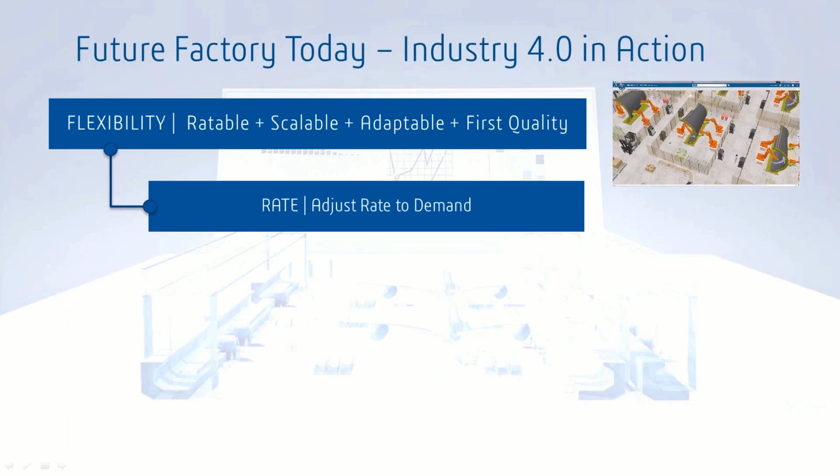Secondly, it's quality. And quality is one of the largest impacts to your production, to your capacity, to your committed date to deliver at the end. And the quality is not only impacted by human beings working on the shop floor, but the entire system, the availability of parts and the help we can give to the workers on the shop floor to produce better quality the first time.

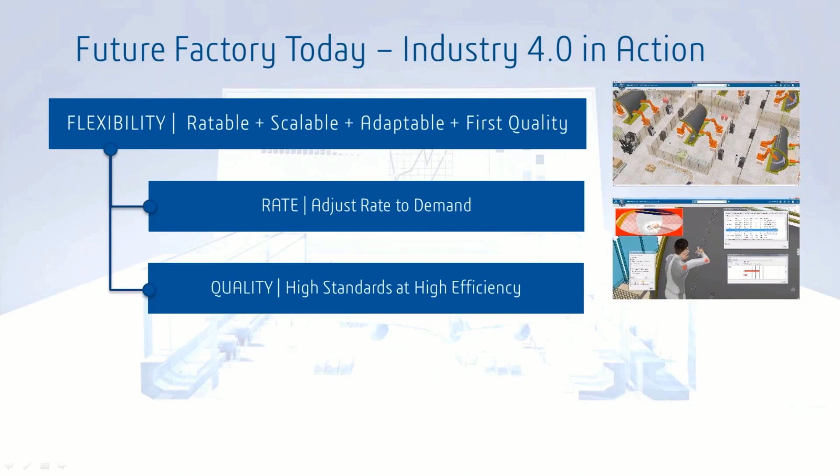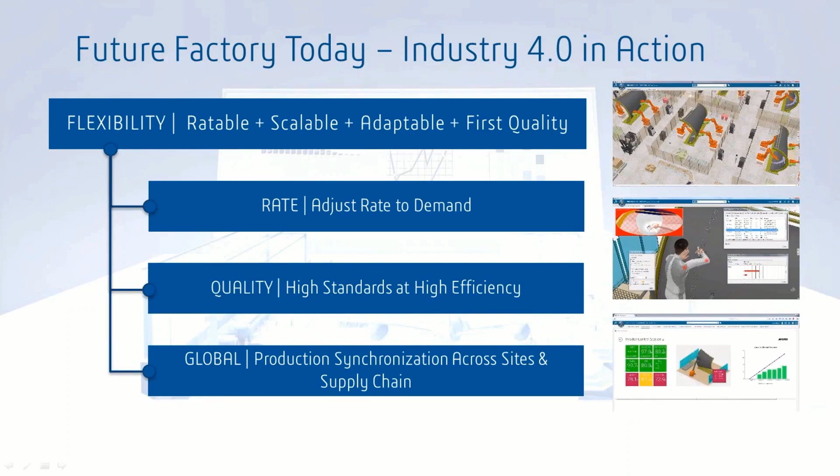Last but not least, globalization. Globalization is a large aspect starting from your supply chain, which is very important to meet your other goals, but also to look at your own production sites. It's not that it's only one; it is usually multiple production sites, spread across the continent or even around the world. And the synchronization of those production sites along your supply chain is very key to achieve your goals and the flexibility in that global system and network.

So we said there's a race, a manufacturing race, and you can see that almost all the governments around the world are heavily investing into the manufacturing of the future. All do it a little bit different, but at the end it all comes to four major pieces they support, and they want to research, develop, and get into a stage where it's really leverageable in your production environment.

First is the digital continuity. It's really the underlying data stream along your value streams, from engineering, design, manufacturing, execution, support, and services. Secondly is the vertical integration and the network of your different sites, your different resources. It's not that you will get the most benefit of focusing on one site and doing something totally different on another site. It's really, how do I evolve a factory of the future network throughout your entire production site.

Then the next step of connecting the smart factory - let the resources learn from each other. Once we establish this continuity, the deployment of the future factory to all your different sites, then let them learn from each other. Let's see how we can drive the factory to continuously improve it.

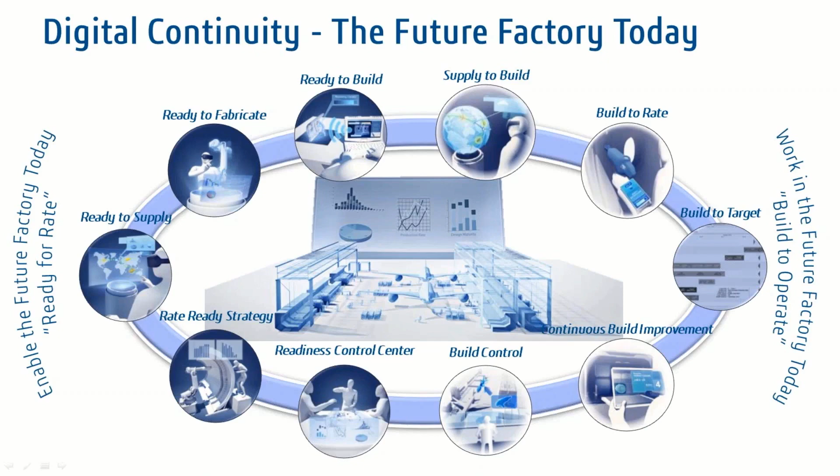To get this data, we have to be able to connect to the real world. And this connection can be to a machine, it can be to an RFID tag, to GPS data, scanners, or the HoloLens when someone is using it for executing work.

But it is key and important that once you go into that direction to have this data available, that you start collecting that data and make it available almost in real time so that you can harvest that and drive your optimization, your intelligence, and then do that loop of optimization throughout your value streams.

This is a kind of a summary slide of what I just said. You can pause here for a minute and read through.

But again, when we talk in the next following parts about technologies and how they can be leveraged for the factory of the future, the digital thread and the 3DEXPERIENCE twin of your production environment is key and essential really to connect those dots, connect those technologies and really leverage that rich data in the future.

So let me take you to Germany, because I'm based in Germany. I like to drive on the Autobahn, but sometimes we have construction sites there, and usually a construction site comes with a short on-ramp. Traffic is still flowing very fast, and you have a hard time to get on the Autobahn.

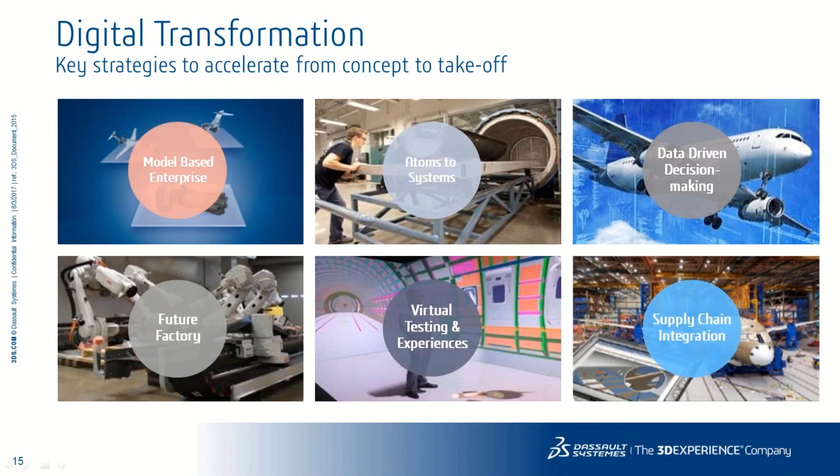So what is this 3DEXPERIENCE network about? As you've seen from the beginning of this webinar, there's a digital transformation going on, and it started a couple of years ago. It's not something new when we think about model-based enterprise, 3D design, and model-based definition data, and how this can be leveraged. But there are more things which can be developed further and will drive efficiency and advantages for the factory of the future and the entire value stream.

Looking not only at the factory of the future, but also the end-to-end process, based on an assessment we did, we see there's potential to cut 50% from the concept of an aircraft to system takeoff. We've demonstrated that with different projects and customers, getting from the idea to the first takeoff or first prototype and concept design in less than 90 days. This is the first indicator of how far we can go leveraging these new technologies and innovations.

So where can we bring this future into reality? I mentioned one site in North America, the 3DEXPERIENCE Center at WSU NIAR in Wichita, and the second one is the 3DEXPERIENCE Center in Hamburg, Germany. I'd like to show you a short video to introduce the concept behind both sites.

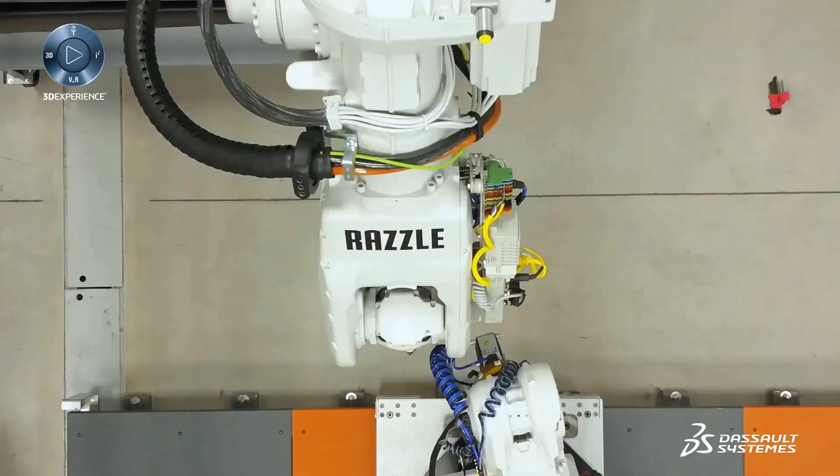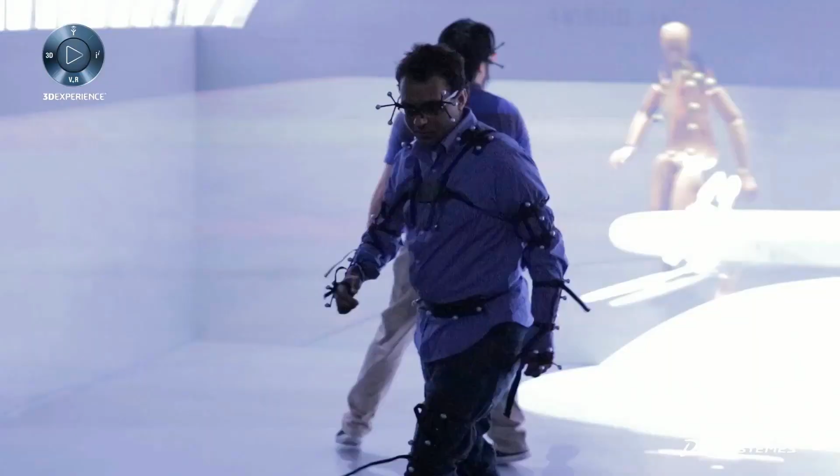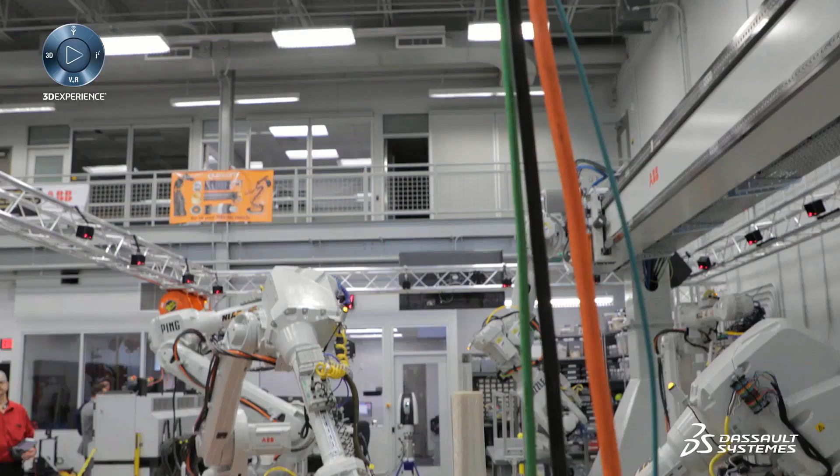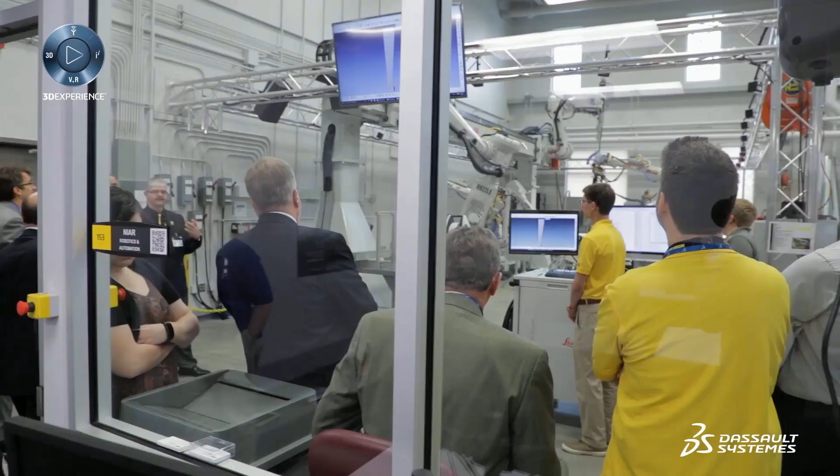We developed the 3DEXPERIENCE Center for various reasons. The sophistication, both in terms of processes, technology, mechanisms, and systems of work, is quickly accelerating. Our customers need a place where they can innovate, experiment, develop new ways of working and new ways of interacting with this technology, and see how that technology fits into their space and existing processes. This facility, although physical, is connected globally.

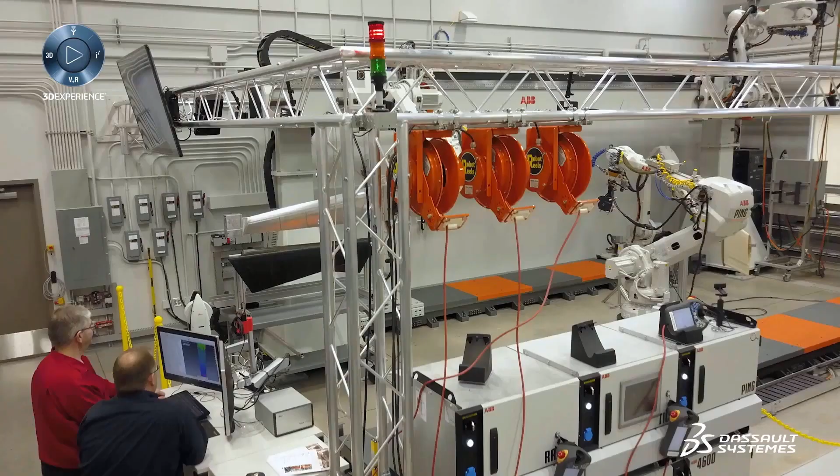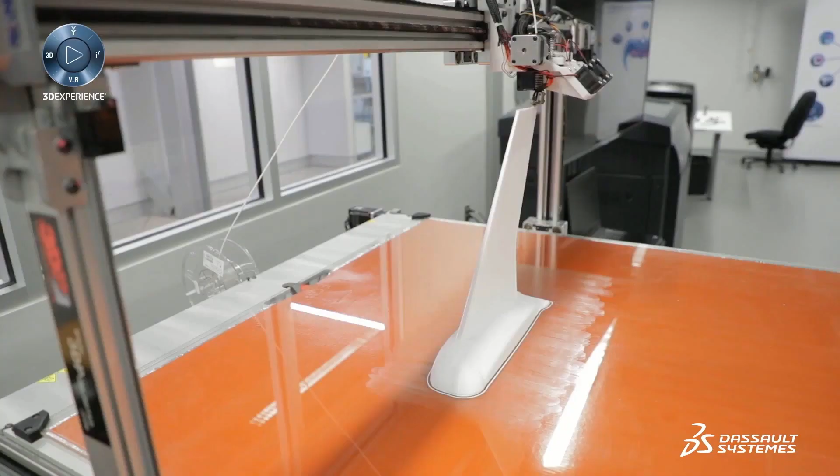Our 3DEXPERIENCE platform is cloud-based. Teams working physically here can be virtually connected with colleagues around the world, or other experts or partners that need to be brought in. We now have the opportunity to drive innovation throughout the world, because our mission and goal is to create an innovation ecosystem where companies can take advantage of this capability wherever they are, whether in Asia, Europe, or the United States. So we have a whole roadmap and strategy to develop this innovation ecosystem.

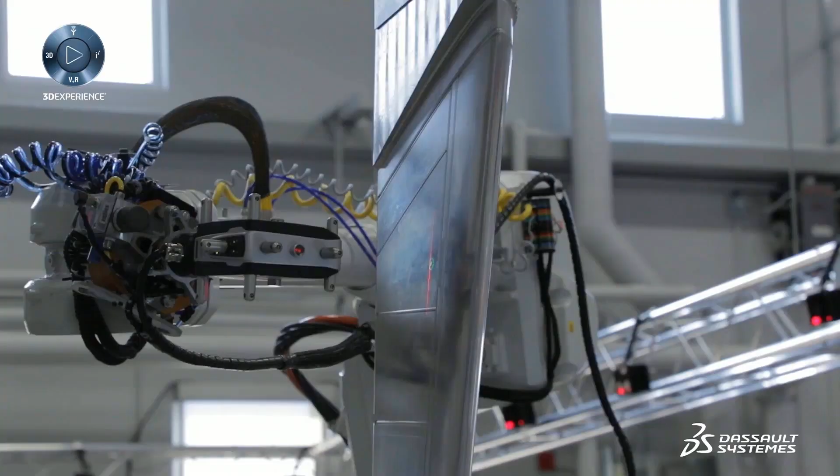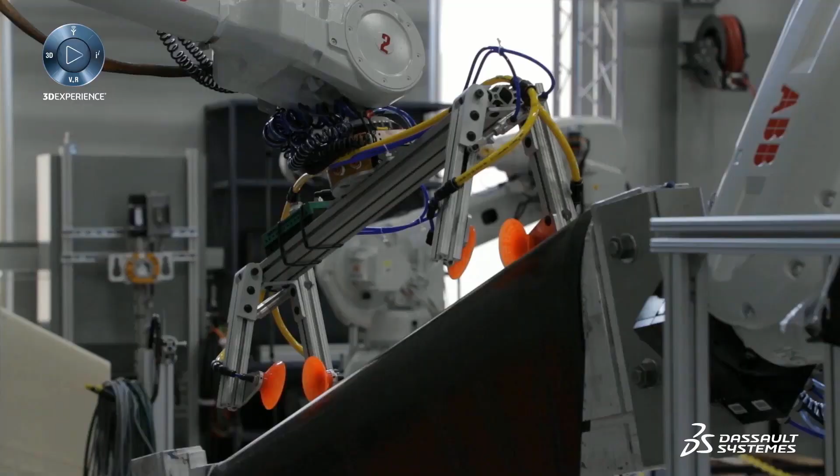If you're a startup and you come to the 3DEXPERIENCE Center, you can leverage all the technologies, processes, system of work, methods, rules, templates, and expertise. We can take a customer out of their comfort zone and bring them into this kind of environment, changing their mindset to allow them to accomplish their dreams. The factory of the future will be human-centric.

I believe in the future more and more people in the world will want very suitable solutions and experiences — not just more of the same object, but differentiation. So human-centric on all aspects: quality of work, quality of the result, and quality of imagination, so people become true makers of great things for society.

With all the experience, knowledge, and partners in an environment like an experience center, we project that we can drive this cost down, accelerating new technologies to a TRL 6, where you can take it out of a lab and deploy it on your production site.

So what are the objectives of the experience centers we established with our partners? The objective is that you go and perform your own research, your own definition of your factory of the future. You can test, you can visualize a strategy and the processes, and you can use all the new innovative technologies which are available in those 3DEXPERIENCE centers.

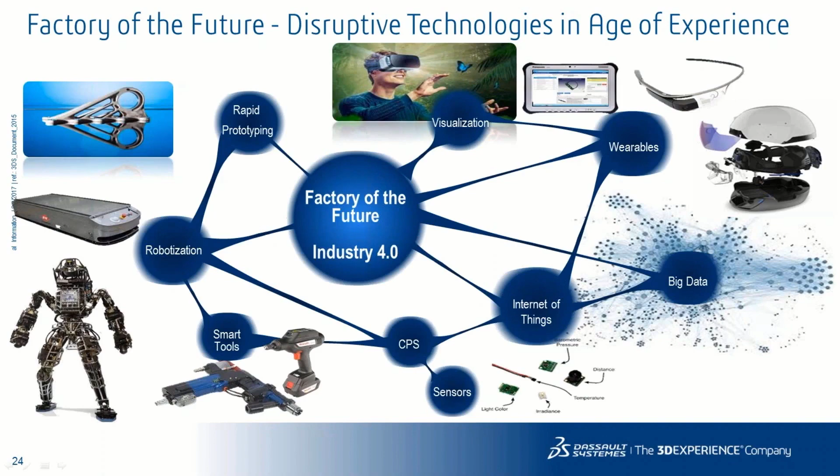How can you imagine it? I have here the 3D layout, the NIAR Innovation Center or 3D Experience Center, where we have a large setup of immersive technologies. There's the largest cave, the robotics MRAM, the multi-robotics advanced manufacturing cell, which is the largest of its kind, a large center of 3D printing capabilities, and then for you and us to work together on projects in collaboration rooms where you can really test drive it.

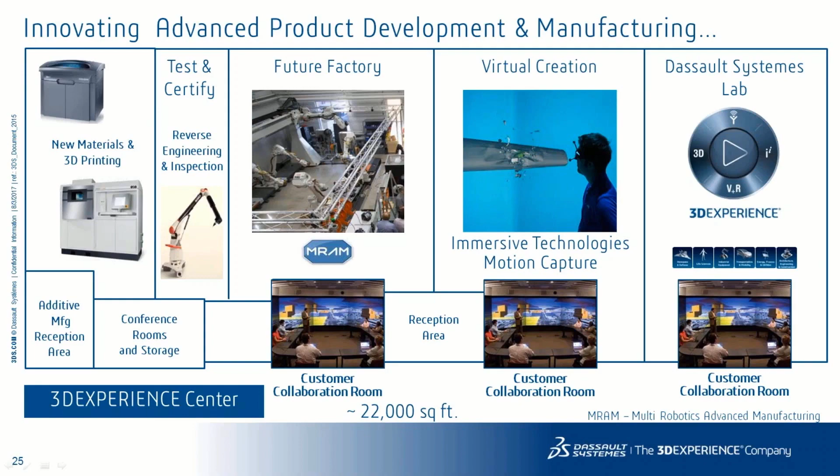You can come with a project with some innovative ideas, go there and leverage all the technology which is there. And in part 2 of this webinar, I will provide you more details on those different capabilities and what you can expect.

So in summary for part 1 of the webinar: transform your strategy and your vision of innovation into reality in these experience centers. This is really the key behind those centers we set up.

Leverage the ecosystem during this transformation. It's not only you, it's not only us, it's not only partners, it is really the network of different companies, individuals who run those centers and can be connected, or should be connected, to be faster and smarter.

Use it as a prototype and create a blueprint, get this environment to a level where you are really feeling confident that you can put it into production. Do it faster, do it cheaper, and then take it out of those centers and put it into your production.

And use it to create your next generation of workforce. We started in those centers to collaborate with universities, the same in Wichita as well as in Hamburg, to educate students, but you can also educate your next generation workforce.

And you remember this was one of the chapters of what we think is key in the future, that the human is still there, and that you have to take the human on the journey into your factory of the future. Those are places where you can take them and educate them, or just let them go with you together on that way to the factory of the future.